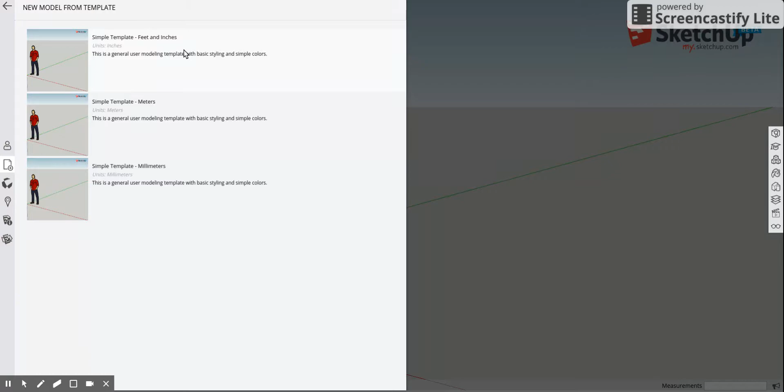To start a new project, go up to the bars, open up the templates, and we're going to do ours in feet and inches. Start by selecting the rectangle tool. Our rectangle is going to be drawn flat on the bottom on the ground, and it's going to be 5.5 by 5.5 inches.

Okay, we can get rid of the person. Now we know that our base is drawn to approximately the right height.

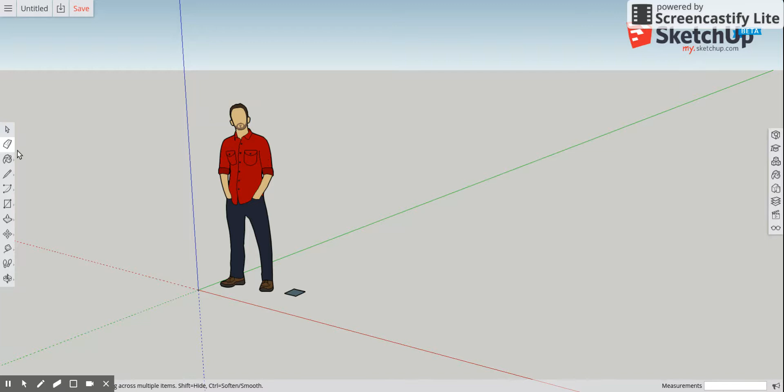We're going to push-pull our lamp base. I'm going to use the mouse wheel to zoom in a little bit, click on the surface, and as I go up, let go of the mouse and type in either the decimal or the fraction for our board thickness, which is 3/4 of an inch.

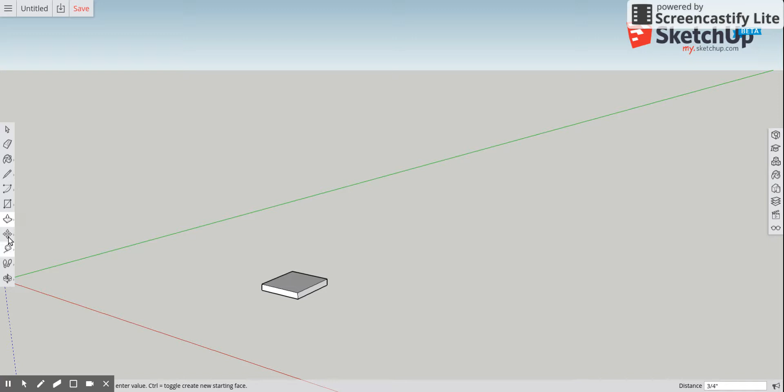Then I'm going to use the circle tool, and if I zoom in even further, I can use the endpoints and midpoints on every edge and line. I'm going to use the midpoint from one and the midpoint from another perpendicular surface to get the circle directly in the center of my base.

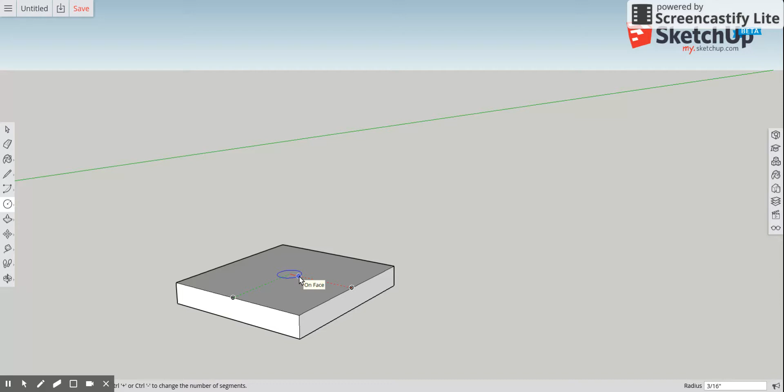Now your design may be a little bit different, but for the most part, most people's wire is going to go through the middle of their base. And also, it's a radius for a circle, so our diameter is 3/8, so the radius is 3/16.

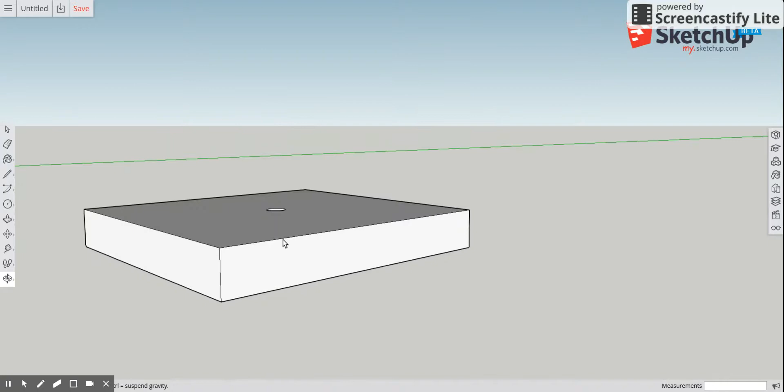Then I'm going to push-pull this down to make it hollow, making it even with the bottom edge. If I hover over the edge and while it's red, click on it, then orbit around to make sure that it is actually hollow. You can see right through it. And that is a basic 5.5 by 5.5 inch base.

To do the follow me tool, I'm going to click on and make an angle. It doesn't have to be exact, but that line turns magenta when it's at a 45-degree angle. Then I'm going to use the follow me tool, click on just that little triangle, and wrap it around the outside edges of the top of the base all the way to the corner. Don't go too far — if you start going too far, back off.

Oh, something happened here, try it again. Something's not right with that. I'm going to hit escape and see what happened — there might be an extra edge or line in there. No.

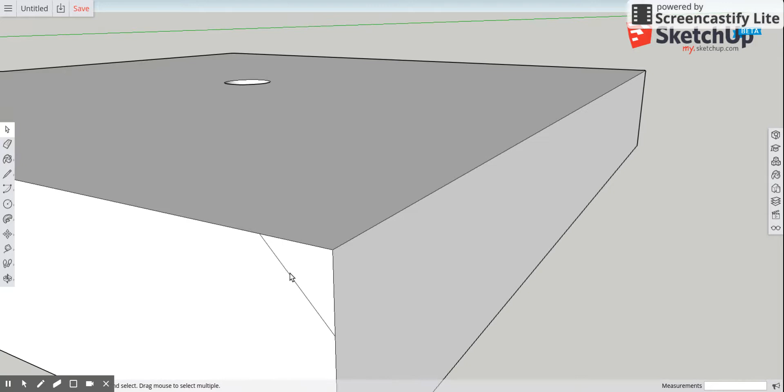Now that it fixed up that corner, as I wrapped around, it snapped right to the corner and made the 45-degree chamfer all the way around the outside of my base.

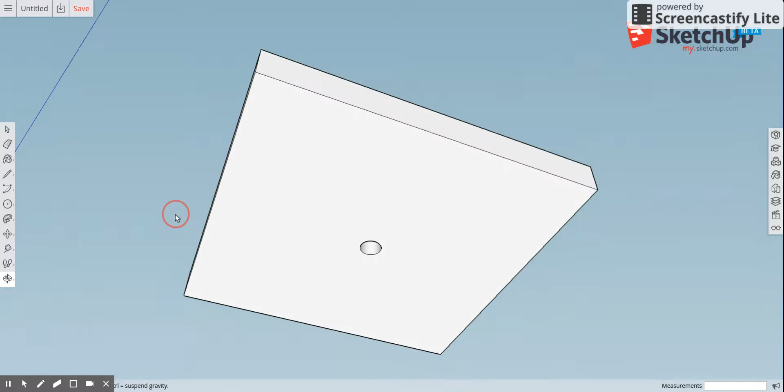Okay, the next step would be to orbit around towards the bottom of your base and make legs. Now the wire can't come out of the bottom of the base and be between the base and whatever you're putting it on, so you have to elevate this surface a little bit.

So what students have done in the past is created square or rectangular legs that maybe were 1 inch by 1 inch. And if you use the move tool and hold down control and click on a surface, it'll make a copy of that surface. So I can do that for each of the 4 corners.

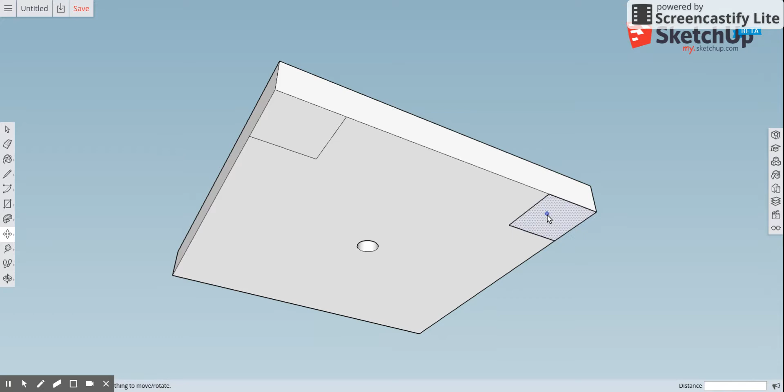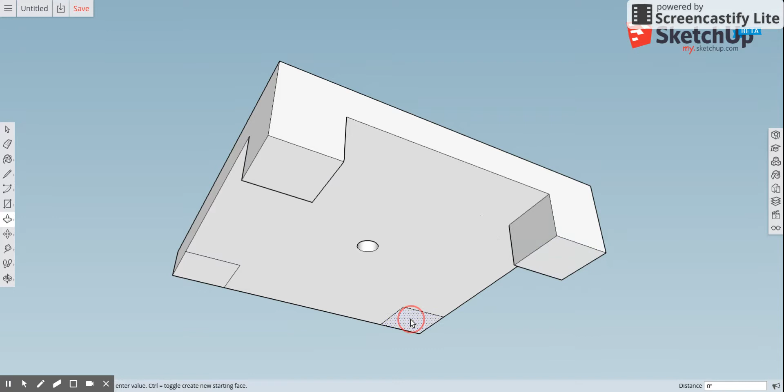You might have to orbit around a little bit to give yourself a better view or perspective that you need. Then I'm going to push-pull these down 3/4 of an inch, because that's the thickness of our boards that we're using. Now I can also click on 3/4 of an inch, or I can use inferring and just infer these all to the same height.

Okay, I'm going to orbit back around, and that is a basic lamp base.

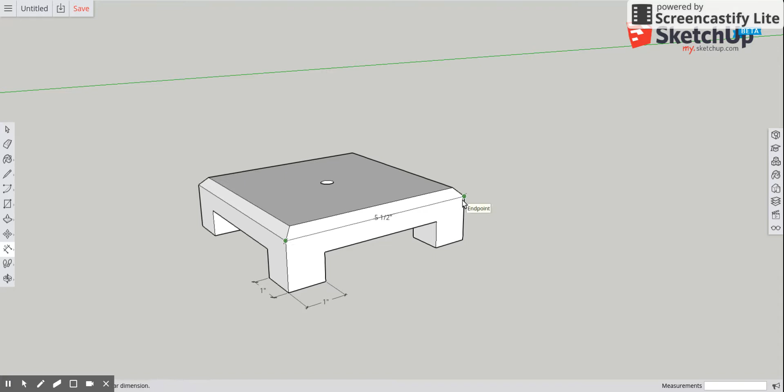Okay, you need to have dimensions on this. So we're going to use the dimension tool, and we're going to dimension our leg, just one leg, 1 inch by 1 inch. We're going to dimension our base, 5.5 inches by 5.5 inches.

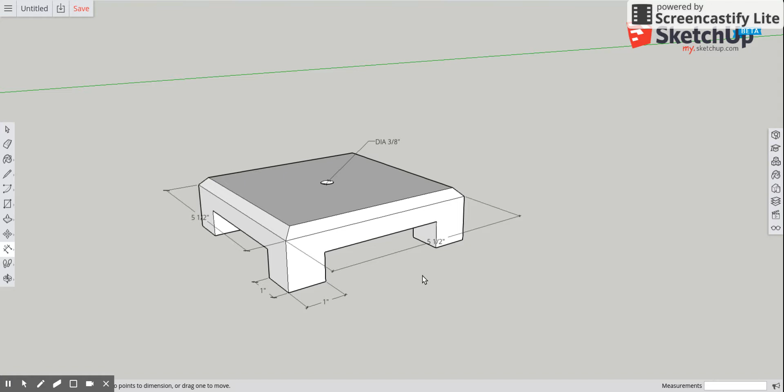And we're going to dimension our circle. It gives you the extension lines and the leader lines automatically on the SketchUp program.

And then the last step would be to paint our project. Now we can use colors, or we can also go in and use wood to make it look like it was going to be stained. So if you wanted a darker stain or a lighter stain, we could stain our project.

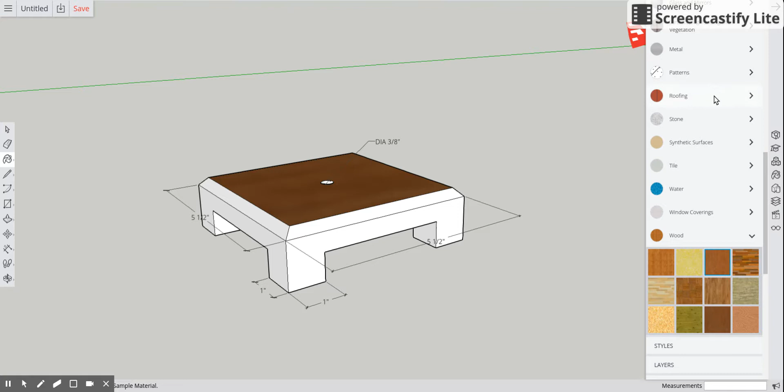We could also paint the project. You're going to go through and click on all the different surfaces that you want, whatever color you're going to make them. Okay, make sure that you orbit around to the bottom and the back to make sure that you have all the surfaces painted.

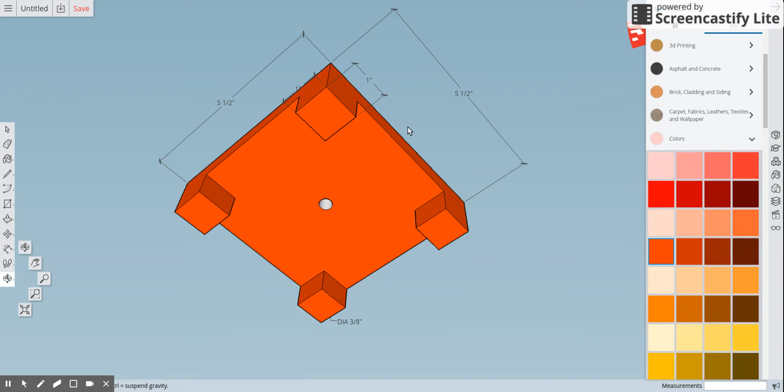Okay, and when that is complete, you're going to save it as a lamp base, and you're going to move on to the lamp face portion of the tutorial. And when both of these are completed, follow the directions to turn in your assignment.